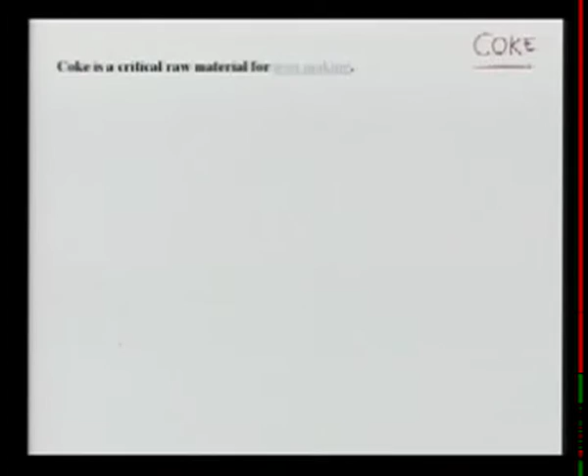Let's see what is the importance of coke. Coke is a very critical, very crucial raw material for iron making and steel making. Not only all large steel plants, as you probably know, would require coke, but also small plants like foundries using cupola furnaces would also require the coke.

So let's see what coke really is and how it is manufactured. In all blast furnaces, if you recall from the metallurgical processes you studied in high school, for operation of the blast furnace, a pure form of carbon is required for the reduction of iron ore, and that also needs to supply some kind of energy. So this reduction undertaken in the blast furnace is essentially because of the coke.

So coke is very essential in manufacturing of steel and iron, whether in large plants or small plants. This pure carbon is called coke. How it is manufactured, we'll go very briefly through the process.

Coke is obtained by destructive distillation, and that process of destructive distillation is also called carbonization of selected coking coal. The coal is carbonized at high temperatures, about 950 to 1050 degrees Celsius.

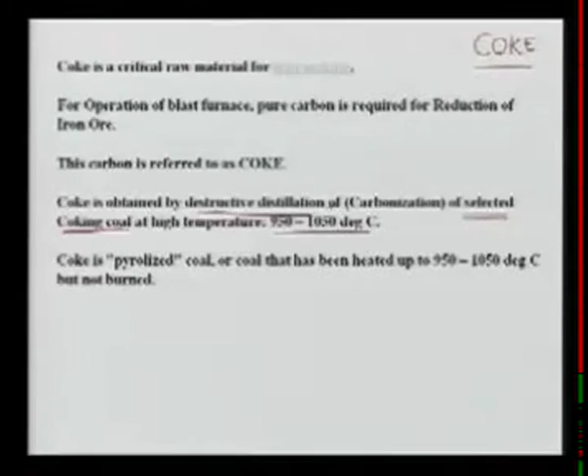Coke is basically pyrolyzed coal. Pyrolyzed means heating something in the absence of oxygen, or near absence of oxygen. The coke is pyrolyzed coal that has been heated up to 950 to 1050 degrees Celsius, but not burnt. We don't want to burn the coal, because out of the coal we want to produce coke, and we only want to heat it externally.

So in the process of heating, what happens to the coal? When you heat the coal, complex organic molecules are formed. Those molecules break to yield gases, some liquid also comes out, and solid organics also come out in the process of carbonization. But what is left, which is of importance to us, is the non-volatile carbonaceous residue, and that is what we call coke.

We will see the process of coke manufacturing in a little more detail, so that we can identify the sources and the important issues associated with coke manufacturing that we need to discuss in this course.

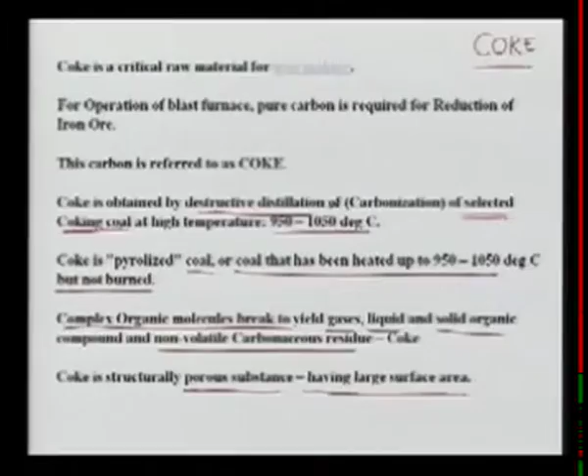Structurally, if you look at coke, it is a very porous substance, and the idea of having it in a porous form is to have a large surface area, so that the reaction, especially the reduction process going on, effectively takes place in the blast furnace or wherever the steel is being made.

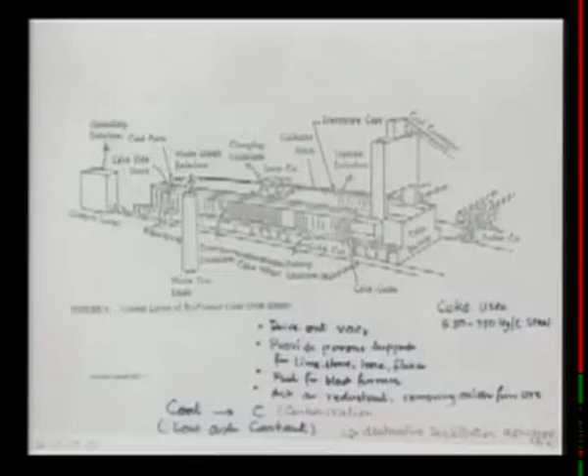Let's see a schematic picture that gives you an idea. I will give you the dimensions a little later, but just see what it takes to make the coke. This figure is the general layout of the byproduct coke oven battery. I will explain what byproduct means, but what you see here is a long housing kind of structure with lots of slits, for example, I will just hatch a small slit here.

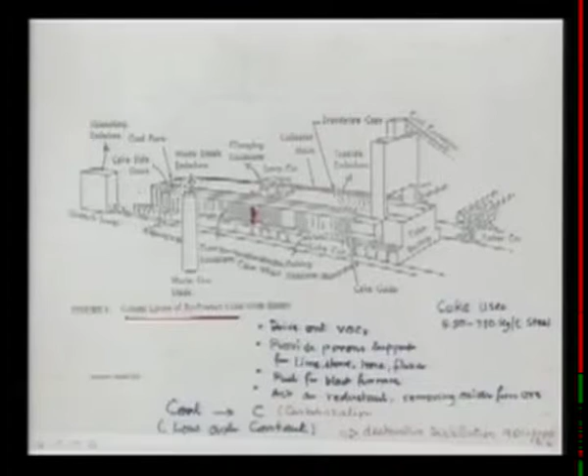Okay, this is a small thing - what you see is a coke oven. There are a series of ovens, as you can see, there could be hundreds of them in this direction. On the top is what we call the Larry car. This Larry car has the coal, and it fills the ovens from the top.

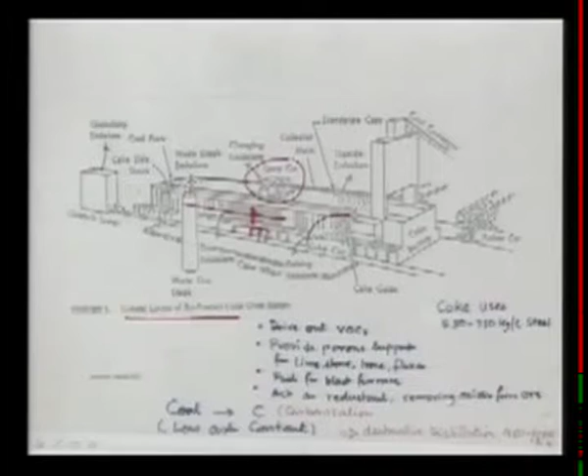Down here, the little rectangles, as I am drawing them for you, is where the heating is done. The gas is burned through this area, and the heated air or gases go up and cook the coal. The coal gets heated up in the process, and the emissions of gases or complex molecules get emitted. Once the coking operation is complete, the coke is ready, and as you can see here, coke is being pushed out and put into the coal car.

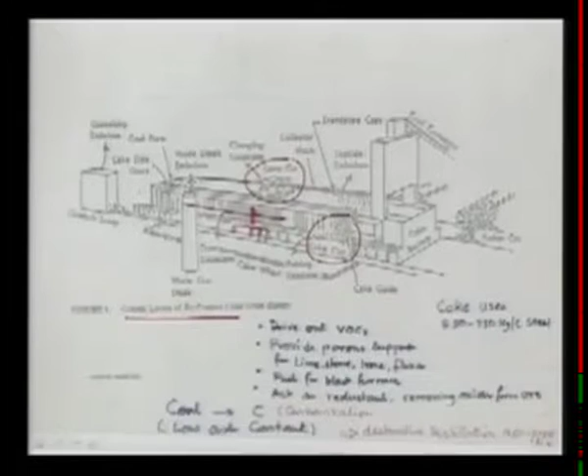So the idea here, I will repeat, is to drive out the VOCs - volatile organic compounds. We don't want volatile organic compounds because we want the pure carbon. So basically we heat things up, whatever is volatile will go away, and this provides the porous support for limestone and other fluxes in the blast furnace. It is also a fuel for the blast furnace, and it acts as a reductant, removing the oxygen from the ore. So basically we are transferring coal into carbon using destructive distillation.

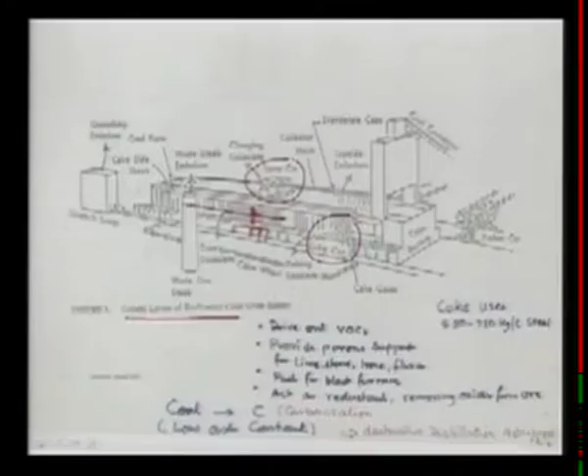What I would do is make a little bigger picture, show you the bigger picture, so things become more clear to you, and that picture just follows.

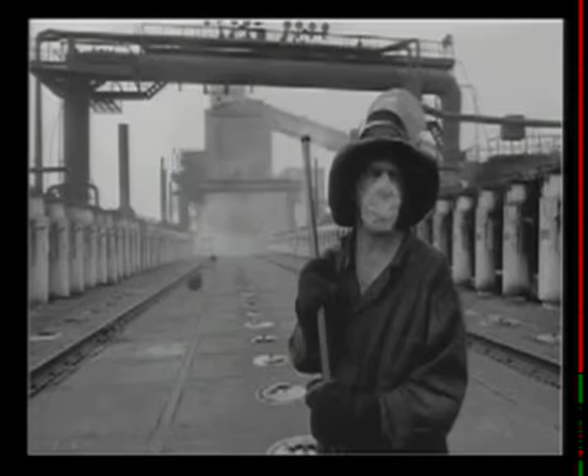This is a real coke oven that I am showing you just to get a feel for how it looks. Before going to the sources, you can see this person here with the mask on his face standing on the top of the coke ovens, on the top surface of the coke oven, and somewhere here you can't see is the Larry car, which I mentioned.

So in this Larry car there is coal filled on top, and these are the holes. You see here the railway track - the Larry car moves on this track, and whichever oven's holes are open, the Larry car sits right on top of it, and coal is put into the oven, and the heating process goes on. You can also see that as the coal is being charged into the oven, there are a lot of dust emissions, as you can see in this area on your screen.

This emission is a serious problem, and we will learn why it is serious. You can see the person standing there - of course there is a lot of heat, temperature is very high, and also the emissions are so toxic in nature that the person has to wear a mask. We will discuss the emissions and what they are in terms of toxicity and the problems they can cause to our human body.

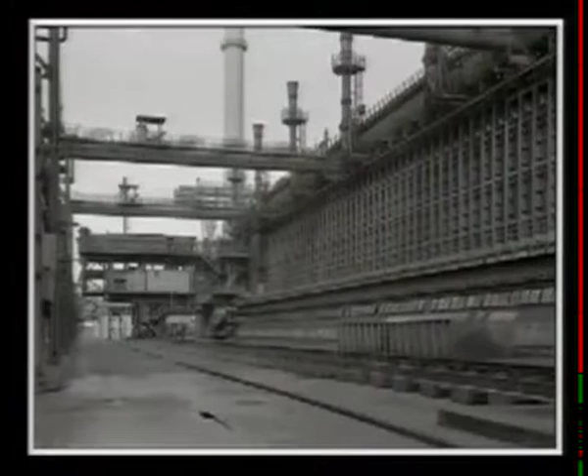So this is just to give you a little feel, and this picture is only at the top of the battery, top of the oven - and I must specify, a group of ovens is called a battery. So this is one single battery. This picture is taken from the side or from the ground. You see here, the Larry car was somewhere here at the top, and the person was standing somewhere here, but now we have the picture taken from the ground.

This is our ground. So these are the ovens, as you can see this light here - the slit, for example, it's an oven. And here at the bottom is what we call the under-fire.

We'll see in detail later, but right now just understand that some heating is done, and this hot air flows around the oven but does not come in contact with the oven, because we don't want to burn the coal - we just want to heat it, something like cooking in the kitchen. We don't want to burn our food, but we just want to heat it. So the coal is heated externally, and the under-fire heats everything and goes out from this chimney, as you can see.

After some time, once the coke is ready - because we have to do the cooking of the coal at a temperature of about 950 to 1050 degrees Celsius, and the cooking normally takes between 20 to 30 hours - once the coke is ready, we need to push it out, and then we will see.

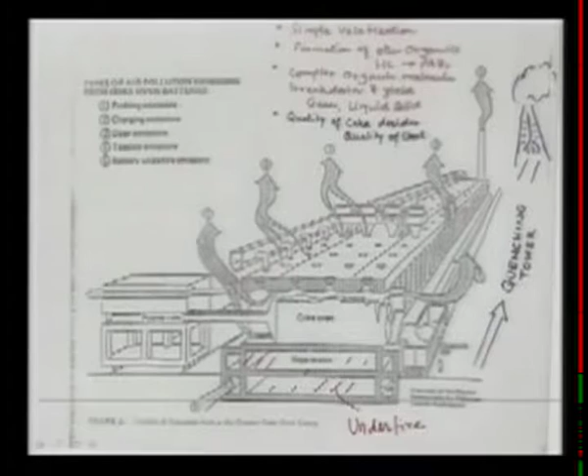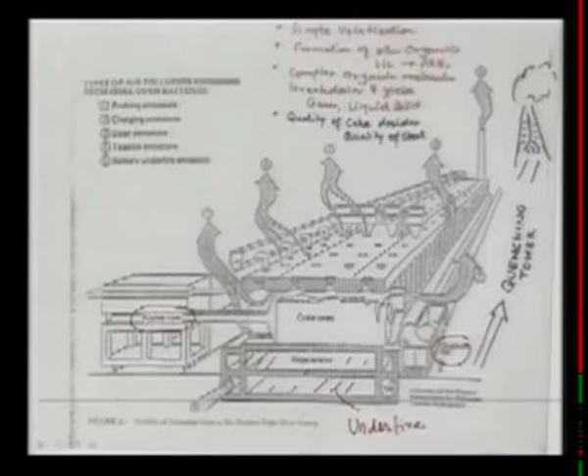So this is coke, and as you can see, as the coke gets ready, it's being pushed. This is called the pushing ram. It's ready, the whole thing is being pushed, which takes away a lot of energy and requires huge machinery. You can see this whole thing falling down onto what is called the quench car. Can you see here? Quench...

Quench car. Why quench car? Because we must quickly cool off the hot coke. If we don't cool it off, since it's hot and open in the air where oxygen is available, things start to catch fire. So if you don't quickly quench it, it's going to catch fire, and you'll see flames coming out, and our entire purpose of coke making will be defeated.

So as soon as the whole thing comes out, we should quickly take it to the quench tower. The whole thing is on a railway track, and it's pushed quickly in this direction and taken to the quenching tower. I have drawn this picture of the quenching tower, and we'll see a little later what the quenching tower is and what it does.

The idea of the quenching tower is to put lots of water, tons of water stored on top, onto the coke, because we need to cool that down. We don't want it exposed to the atmosphere so that it starts burning, otherwise we are in trouble both from the pollution point of view and the production point of view. So this is one part.

Let's go back to the top of the coke ovens and see what is happening. You see here the coke oven top. This is the Larry car which I showed you, and these are what we call the charging holes - this is a charging hole, this is a charging hole, and so on. The Larry car moves back and forth and fits exactly onto the charging hole. For example, whatever oven this is, that's being charged.

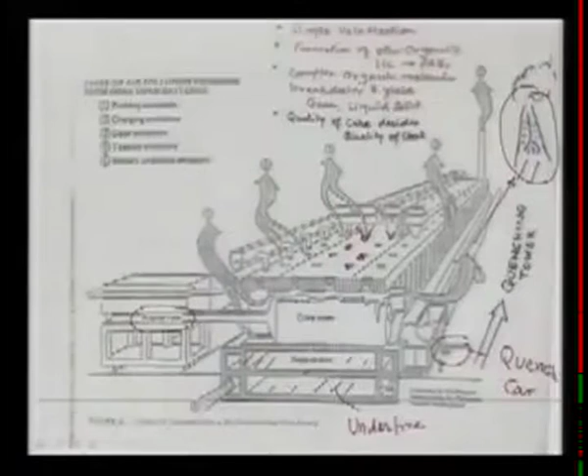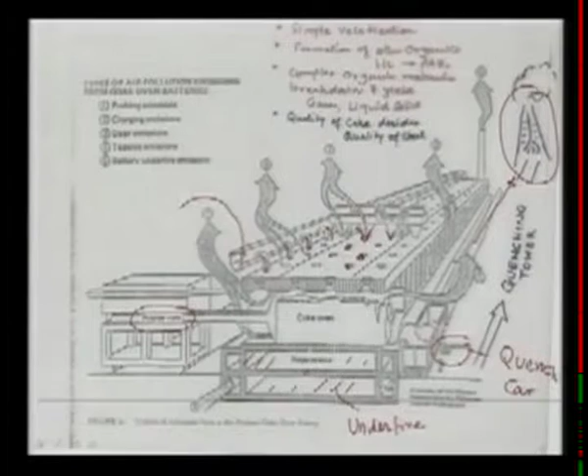The air must come out. Where does that air go? What you can see here is this air, which is being replaced by the coal, is driven out from these pipes. This is the pipe which is active right now, and all the air that gets replaced and all the emissions that take place are passed through this duct, if you like - this is the duct. This is called the mains.

All the air that gets replaced, and in the process whatever emissions take place, must go to this duct, and then all the dirty air is sucked through this duct and taken to a process called the byproduct recovery plant. Right now we are not showing the byproduct recovery, but you can see in the title there is a byproduct recovery. So all the emissions that take place must go to the byproduct recovery plant. Otherwise, if we did not have this duct here and had not done the collection of the emissions, they would come out in the air and cause lots of problems.

You can already see we had this main, we had the collection system, and even then the person was wearing the mask, so there were problems. But if we had not had this main, the emissions would be even more enormous. So it goes to the byproduct recovery plant.

Having said that, you can also see this chimney, which is number 5 - these numbers will come slowly. These are the emissions taking place from the underfire. The underfire gets heated up, and then it comes out from the chimney at the end through this chimney, so again emissions take place.

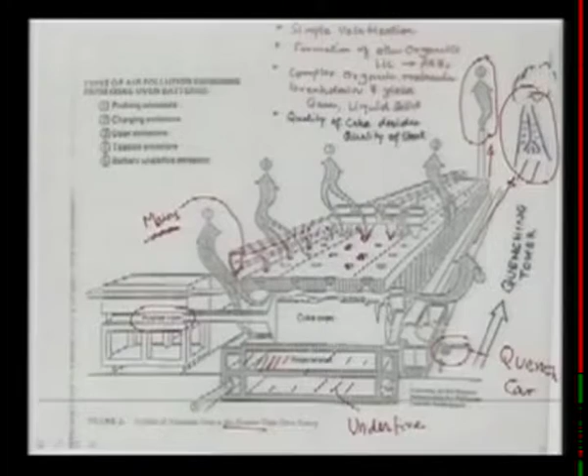So now let's look at the fact that although we have the mains and most of the pollution or emission is being collected and going to byproduct recovery where we'll control this source, in spite of having this system, there is still air pollution that takes place. The major sources are listed as number 1, number 2, number 3, number 4, and number 5, and I would also say number 6, which we will talk about in a moment. Number 1, as you can read here, is called the pushing emissions.

Pushing emissions occur because as you are pushing the things out, whatever vapor forms or vapor compounds are there get emitted from the sides. Earlier everything was closed, but now it is open because we are taking the things out, so all these emissions take place.

The second thing you can see here is the charging emissions. The charging emissions occur when you are charging the coal, and who is charging the coal? The Larry car is charging coal. When the coal is being charged, as it replaces the space underneath or the air, the emissions take place - that is emission number 2.

This emission is very significant. In fact, the picture I showed you of the person wearing the mask - he was trying to stay far away from the Larry car so he wasn't exposed to the air pollution problem. So here the emission takes place as the coal is being fed into the oven.

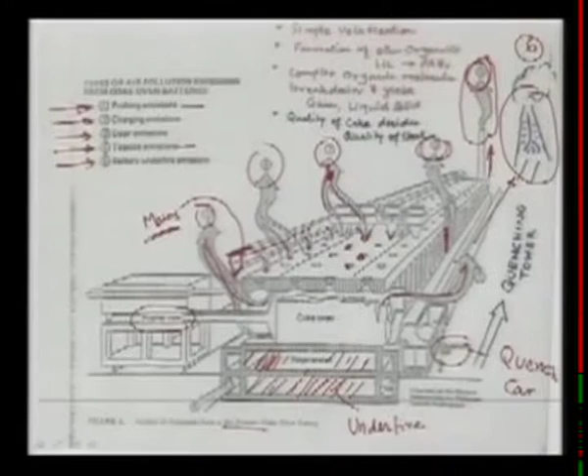But the number 6 emission, which is very important, is when the quenching car takes the coke out and goes all the way into the quenching towers. Huge amount of water is put onto the quenching tower, onto the coke, and we have large amounts of burning coke. We put a lot of water, so there will be a lot of emissions and evaporations, almost like vapor clouds. This will also cause serious air pollution.

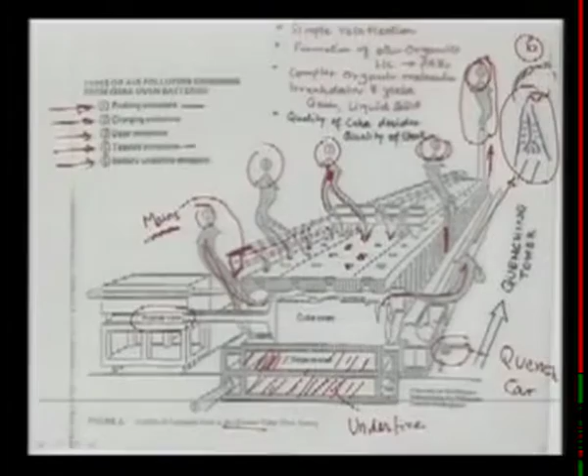So what we have covered so far: what is coke, why we need it, what its purpose is, how it is manufactured, and the main principle is the destructive distillation of the coal, which we call carbonization. We also tried to show you pictures to give a feel of how big these units are, and what are the possible sources of emission even from a plant which has a byproduct recovery system, and why these emissions occur.

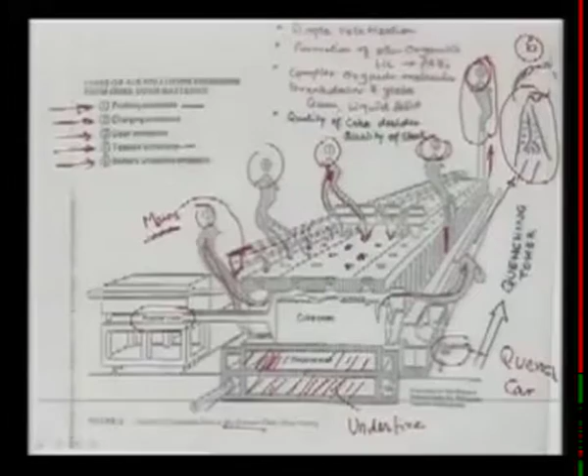Mostly they are door leakages, top emissions, under-fire emissions, pushing emissions, quenching tower emissions, and battery under-fire. So you can see these emissions will still take place in spite of the fact that we have a collection system. If we had not had the collection system, things would look very bad - it would almost be difficult for anyone to even stand close to the plant.

So these are the issues, and then again we will go to the next slide and try to show that pollution is there, but what is so special, what is so important that we need to study it separately in a separate lecture and not just combine it with some other lecture.

This picture I have already shown you, now let us go to this one. Let us look at the emissions. I've given you the general emissions, and now we'll go to a little bit of the specific emissions. Just to get a little feel, I'll read the sentence here.

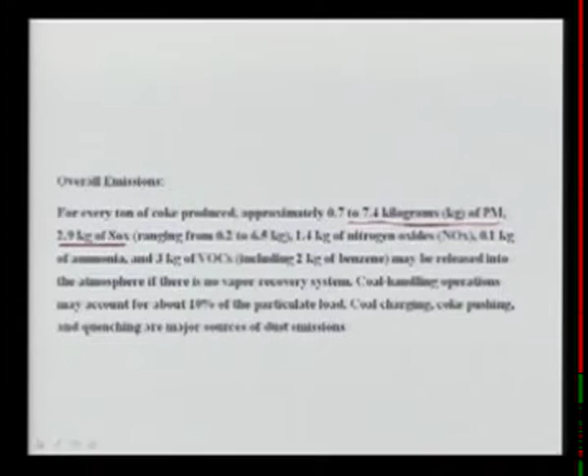For every ton of coke produced, approximately 0.7 to 7.4 kilogram of particulate matter - PM stands for particulate matter, which is largely dust - and 2.9 kg of SOx, oxides of sulfur, are produced. Huge amounts. Let me give you a little feel as to the coke requirement, so that you know the quantity of coke required.

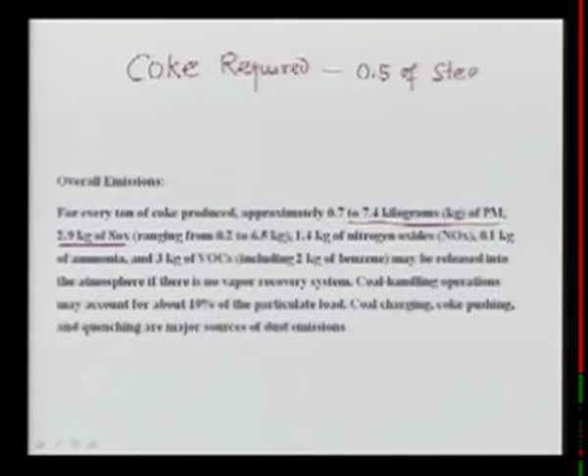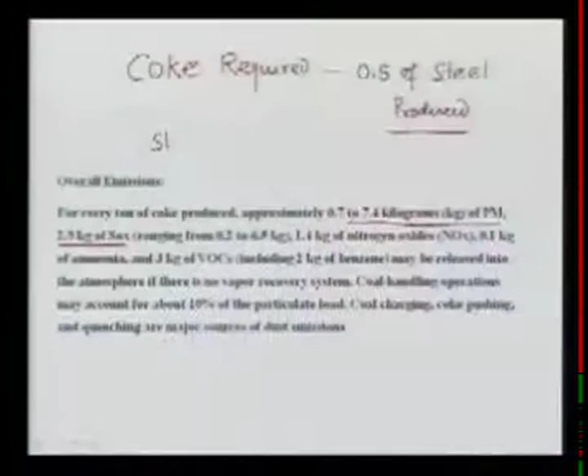It is almost 50% of the steel produced. You know that steel plants are very huge, very big plants - size varies, but a typical plant on the larger side can be a 10 million ton plant. This is a very large plant, with an annual capacity of 10 million ton.

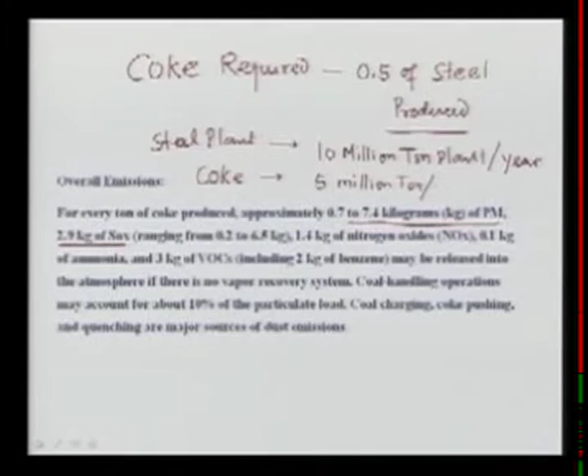So to give a little feel, this plant will require coke of about approximately 5 million ton per year.

These are not the small quantities that we are talking about. Once we are making the coke, what are the emissions that are taking place? 0.7 to 7.4 kilograms of particulate matter, 2.9 kg of oxides of sulfur, 1.4 kg of nitrogen oxides, 0.1 kg of ammonia. Look at that. You wouldn't expect ammonia, but the ammonia is also emitted.

3 kg of VOCs - you remember VOCs stand for volatile organic compounds, and most of them are cancer causing, which can very adversely affect human health. So that becomes very, very important. Including 2 kg of benzene, and you all know benzene is a carcinogenic compound. Benzene is also emitted from automobiles, and we all talk about benzene control, but this is in no way a small amount.

This is a huge amount, and may be released into the atmosphere if there is no vapor recovery system. Vapor recovery system is the same as I was talking about the byproduct recovery plant. If there was no byproduct recovery plant, the emissions could be of this order as specified in this slide.

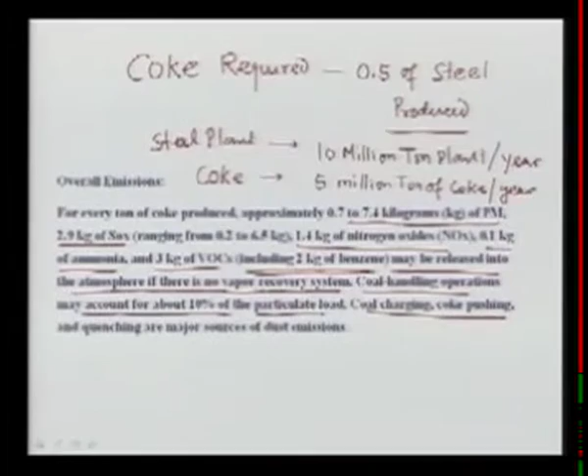Apart from this, coal handling operations may account for about 10% of particle load. Coal charging, coke pushing and quenching are always a major source of dust emissions. So you can see both in terms of quantity the emissions are large, and also in terms of toxicity, because some of the compounds emitted are very serious cancer causing compounds, and we need to control them.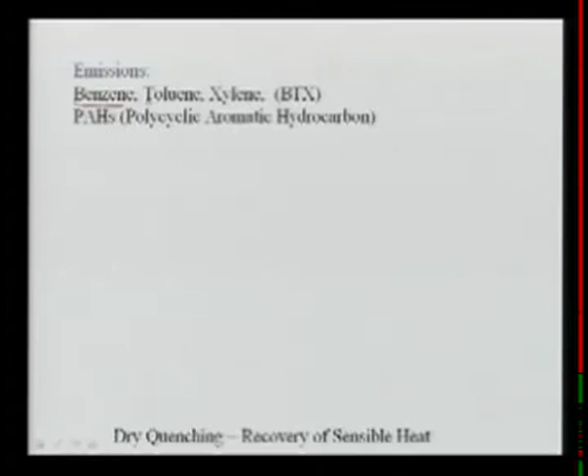So the emissions are not only particulate matter, SOx, ammonia, but there are more things. Now we are trying to get a little bit more specific to the kind of pollution taking place. The benzene I said earlier, but in other quantities, toluene is also emitted from coke making, as is xylene.

The common name given to these three compounds is BTX. So in the rest of our discussions, we will refer to this emission as BTX rather than simply calling it benzene, toluene, xylene. We will simply call this the BTX.

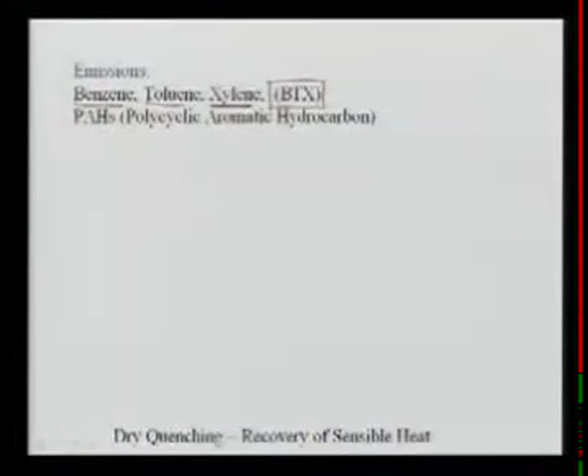Apart from that, these emissions also include PAHs, which are nothing but polycyclic aromatic hydrocarbons. These are again a group of compounds, very toxic, proven carcinogens, meaning they can cause cancer in the human body. So this becomes an important issue.

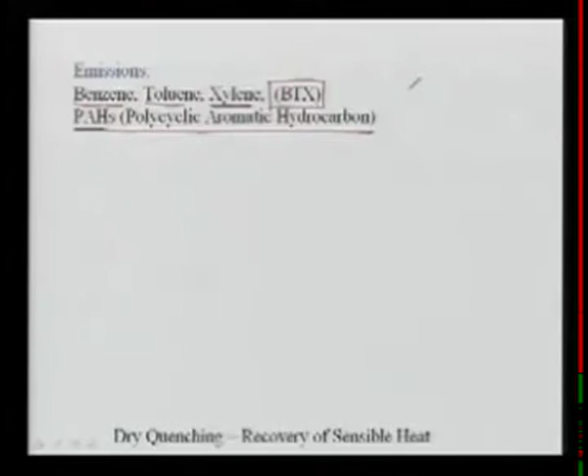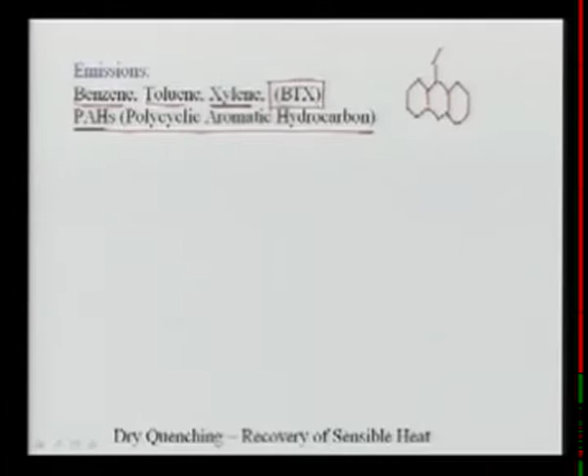If you don't remember what aromatic hydrocarbons are, when you have more than 2 benzene rings fused with each other, that becomes a PAH. You can see here there can be many benzene rings as I am drawing them, that can also be combined like this. So this is a typical chemical structure of PAHs.

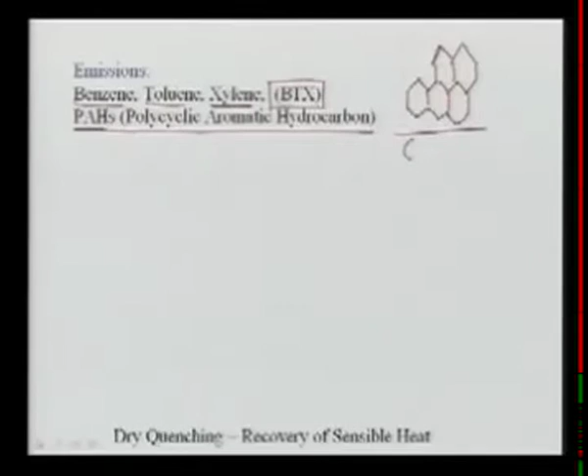This is just one compound, and you can see you can almost produce hundreds of PAHs, and most of these PAHs are carcinogens, which can cause cancer, and therefore we need to control them.

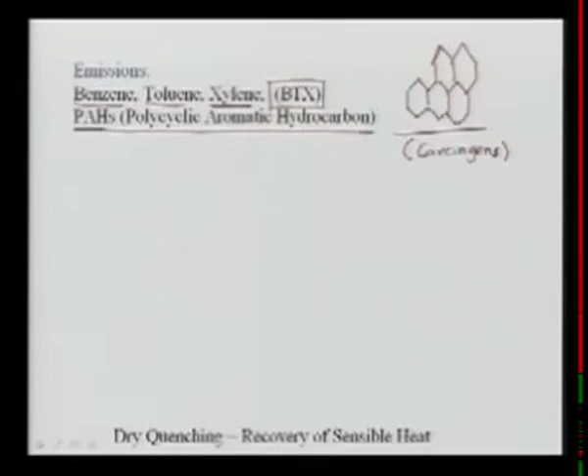So this is the table showing what we had discussed as the sources of emission, but we didn't discuss what kind of emission comes from each particular source. So I made this table so you can see, depending on different sources, as you remember we talked about sources 1, 2, 3, 4, 5, 6, what would come out from those. The first source was the chimney or underfire, which will have combustion related emissions, because here we are burning things.

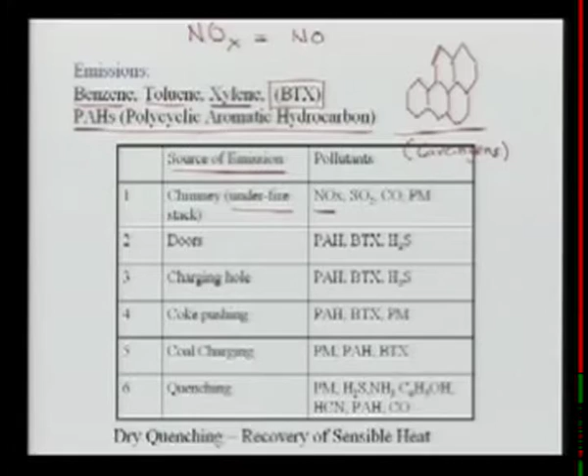NOx - you remember what NOx is? NOx is the summation of NO plus NO2, that is what we call NOx. So you have NOx, sulfur dioxide, some amount of carbon monoxide, and PM here is particulate matter - that is the dust.

Now we also remember the door leakages - simply we can even write here 'leakage'. Door leakage - and what emissions will come out? PAHs, BTX and H2S. The dust is not likely to come out, but carcinogenic compounds, a serious problem, and we also have the benzene, toluene, xylene and H2S. Why H2S?

Because the coal may contain some sulfur, and we are not burning the sulfur - conditions are reduced conditions. So this sulfur will come out as H2S or hydrogen sulfide gas, and as a result it may be worthwhile to indicate that the doors which are leaking more, H2S comes out.

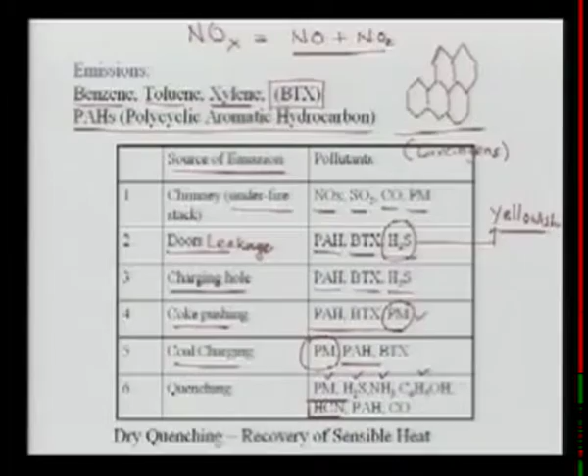It has also been reported that some amount of cyanide in the form of HCN is likely to be emitted in the air or becomes part of the water, since we are quenching the coke with water. So some cyanides have been reported, along with some PAHs and some carbon monoxide.

So what we have learned here is that in spite of the good recovery system, which works through the mains and the duct sucking the gases or volatiles being formed, there could still be emissions, and these emission quantities can be large, and not only large, but very serious in terms of their toxic nature.

This issue of the coke ovens becomes very significant, because it has a direct and very significant impact on public health, especially for the people operating the coke ovens. Remember the person standing with the mask on his face.

Let's take our discussion further and talk about some of the controls that we can discuss.

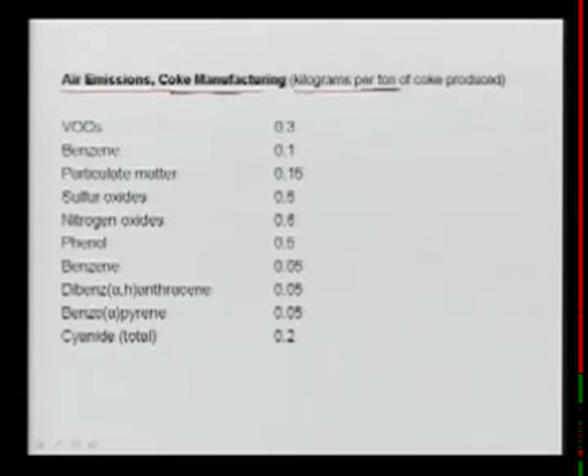This table shows the total air emissions that can take place from coke manufacturing, with units in kilogram per ton of coke produced.

These emissions being talked about are the uncontrolled emissions. These quantities are not small in any sense, they are really large quantities and they can influence the air environment.

Maybe this benzene, you also have benzene here, is probably in the water. The source where I got this information is from a World Bank document, I should have given you the source.

We now have a fairly good idea of what is being emitted and in what quantities, and why it's important, because of the associated toxicity.

I want to do an example for you just to give you a feel that these emissions are not small, they are serious emissions. Here is the example.

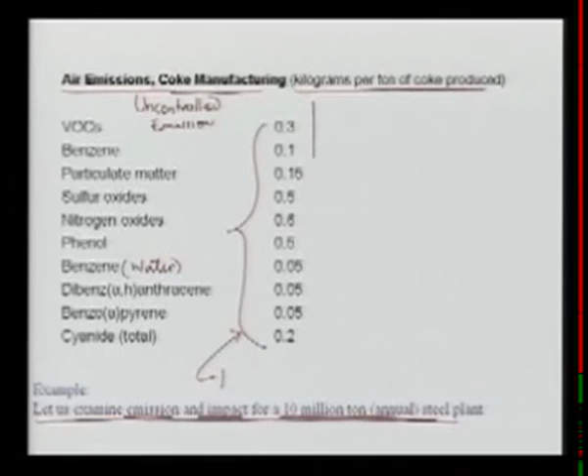Let's examine the emission and impact for a 10 million ton steel plant producing annually 10 million tons of steel. We'll look at emission of a compound, taking the example of Benzo(a)pyrene, the most dangerous compound in the PAH category, having 5 benzene rings. We call it BAP for short, and we'll consider its uncontrolled emissions.

For a 10 million ton steel plant, how much coke does it need to produce? The coke you need is 50% of the steel that you are making. And how much steel are you making?

Tons per year, okay, so this is my coke requirement, simple thing. Now I want to know my coke in terms of tons per day, because I also want to see the impact.

So I have 0.5 into 10 into 10 to the power 6, and suppose I am taking about 350 days of working of the plant. So if I take this as 350... am I doing right or wrong? Yeah, I'm doing right. Okay, let's write it properly.

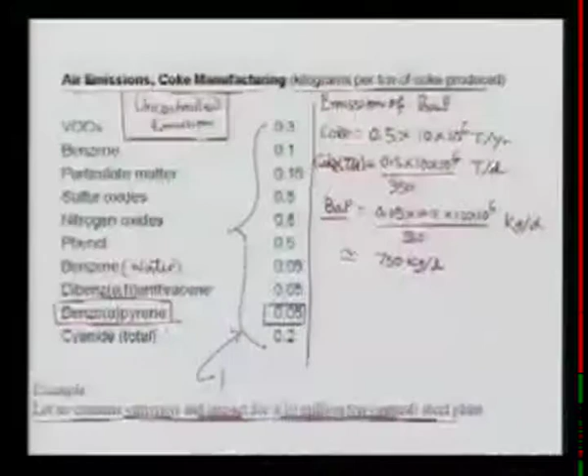Now let's also see what it really means to the people living in that area, because after all, public health, good health of the people is what environmental engineers always try to do. So suppose, it's a simple example or calculation that we are doing. There are more complex, difficult ways to do all this. Assume that the entire BAP amount is spread into the volume of, let's say, 5

kilometer by 3 kilometer and height of 1 kilometer. Let's say everything disperses into this, and what it really means in terms of the concentration of BAP that people will be breathing in their lungs. So that's what we want to find out.

So let's do the concentration part, the concentration of BAP, and this is what we are talking about every day. So almost 750 kg is emitted. And how much volume? Let's write in meters. 5 kilometer equals to 5,000 into 3,000, into 1,000. And then I can convert kg into grams, and grams into micrograms, and the units now I am having is microgram per meter cube. So 9 zeros I can remove.

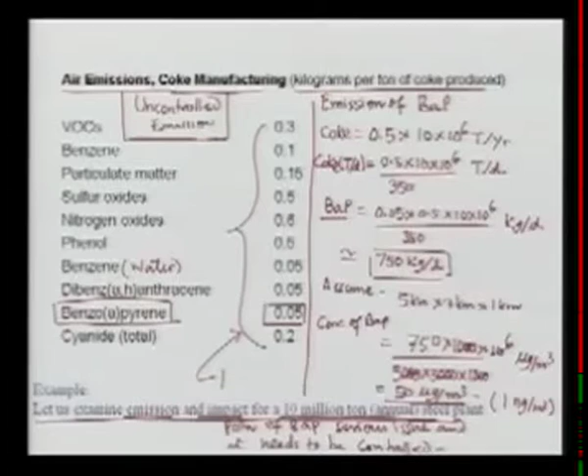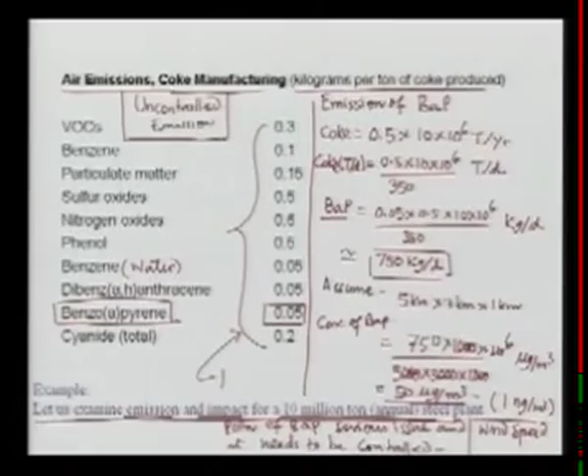So we need to control all sources. Just simply saying BAP must be controlled is not enough; in order to plan the control, we should know where to control, what are the sources and what are the difficulties. So we'll talk about some of the control systems people are using. This is a simple calculation - normally we should also account for the wind, but we've taken a simple example to give you a little feel. The actual modeling part we learn a little later in the course will require more information on the meteorology, wind direction, and other things, but we won't discuss that right now.

Okay, now let's talk about the control. Let's recap what we have done so far. We have talked about the process, what is coke, why it is required, what is the process, what are the emissions, what are the emission sources, and within the emission sources what are the important compounds we need to know. We did a little example to show how much could be released and what the impact could be. So we have concluded that we need to control these emissions.

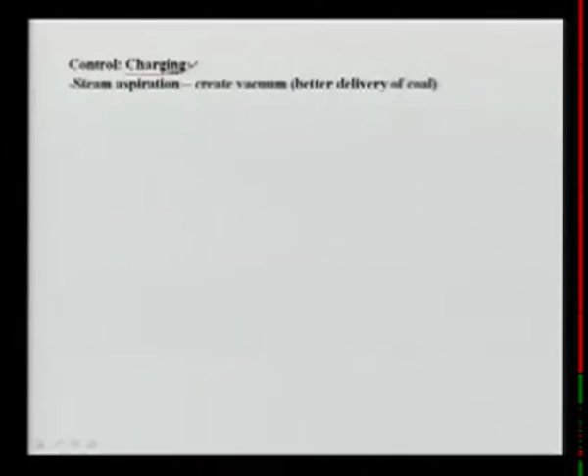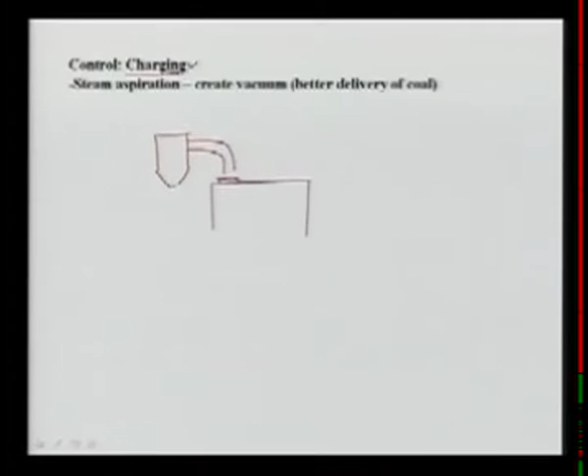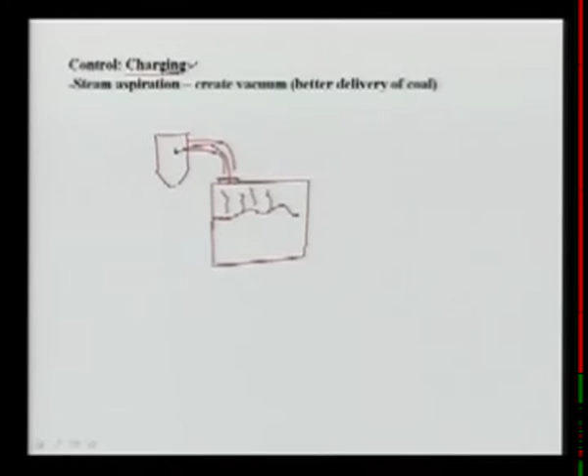So let's see what we do in the main duct. The problem we are talking about right now is at the time of charging, what can be done. You remember there was a main duct. This is a cross section of the battery, and this is the coke that is being made. Whatever emissions are taking place, because this is under positive pressure, they are sucked through this main duct.

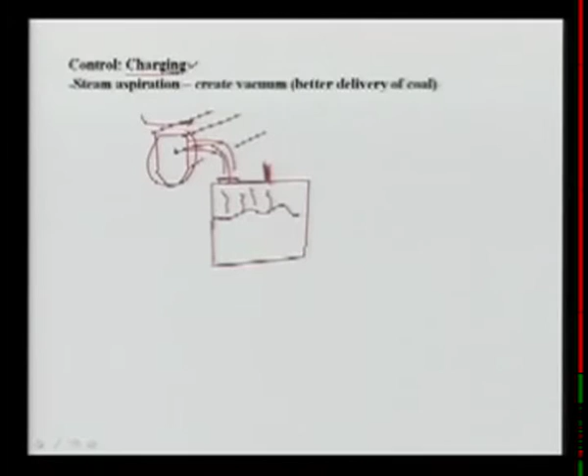So what is done is, when we are charging something, the larry car is sitting here and pushing something, so that is the time we should increase the vacuum and increase the suction rate, so that whatever emissions are taking place are taken out. How it's done: suppose at the side I put some steam in, it creates a little vacuum here, and quickly all these emissions will go through. So that is what we do, create a vacuum, so that there will be better delivery of the coal. By creating more vacuum at the time of charging, we are sucking more.

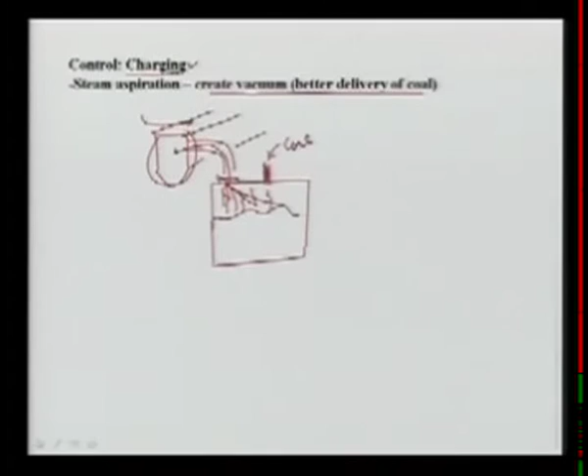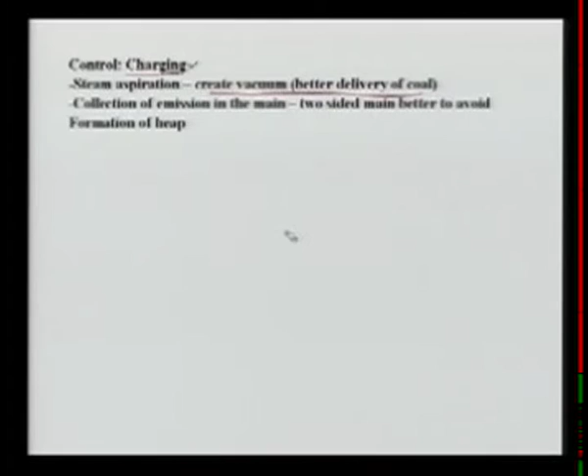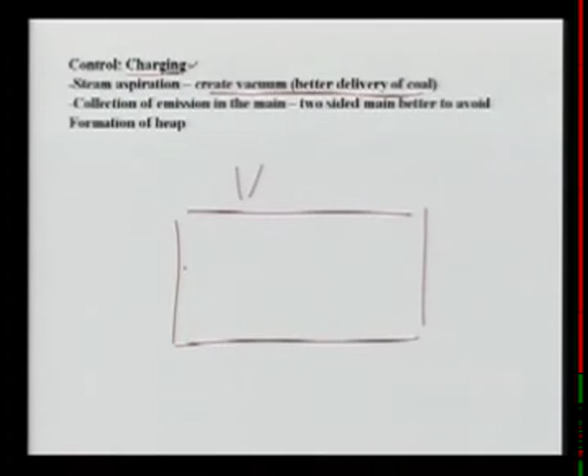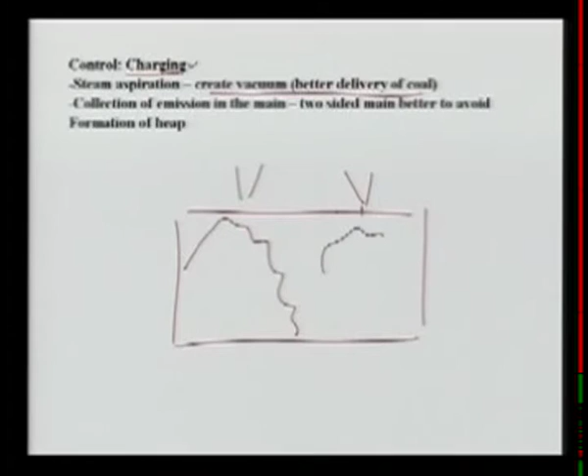Let me remove this so you can see it clearly. Collection of the emission in a two-sided main is better to avoid the formation of a heap. See what happens: suppose you are charging, and this is your oven, and as you charge from the larry car, it will form a kind of heap here, and as you charge on this side also, you create a little heap here. So the new technology is that you take this to the main pipe or main duct, which looks something like this. You should also do it from this side as well, so that from two sides you are taking out the dirty air, not just from one side. That's what is written here: collection of emission in the main, two-sided main, better to avoid formation of the heap.

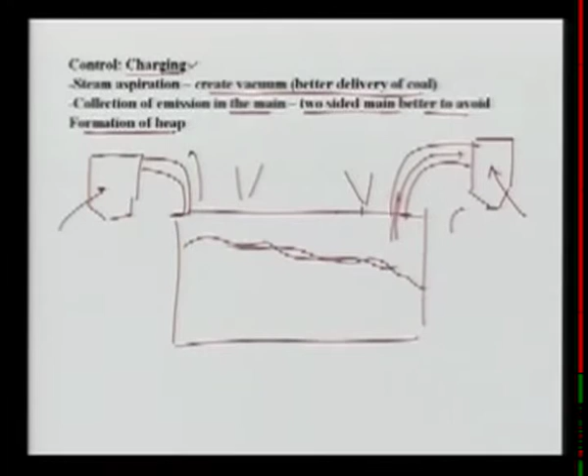Otherwise the heap will be formed. If you are sucking here, the heap will not be formed. If you are sucking from this side and that side, the coal will not make a heap, but will tend to spread out over the whole area, because you are also sucking from this side. So the coal will spread, and the emissions will go to this main also and to this main also. And remember, the emissions go to the byproduct recovery plant. So this is how it can be controlled. The major pollution problem is during the charging, and we are able to resolve this problem. The emission is treated in the byproduct recovery plant. Once the emission is collected from the main, it goes to the treatment plant.

Some people are also talking about the leakages. The Larry car hopper should be tight with the charging hole, as the Larry car is charging and there's a hole here, this must be made tight, otherwise there will be leakages from here. This is the Larry car, for example, and this is the oven. So the fitting should be very tight.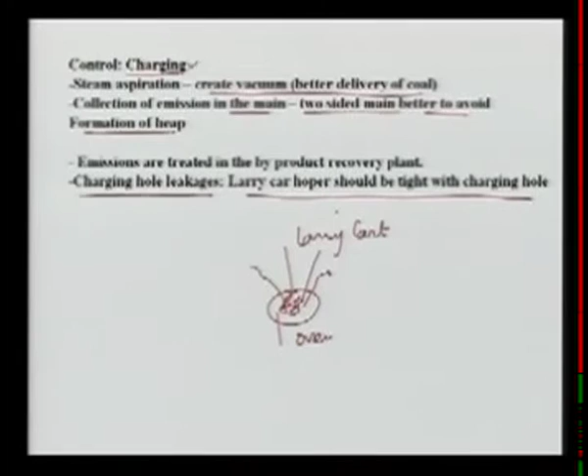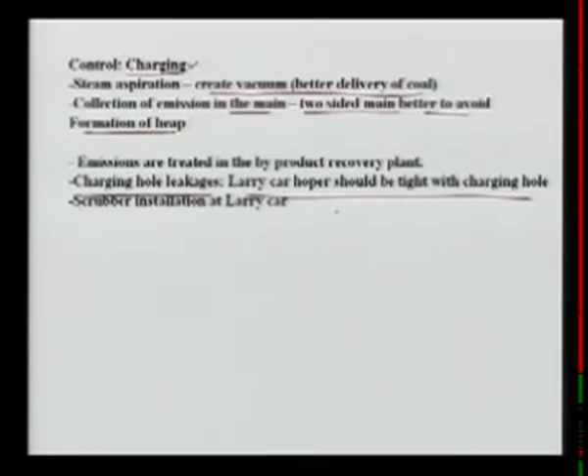And sometimes on top of the Larry car, a scrubber is provided to handle whatever emissions take place, so that is passed through the scrubber process.

After charging, the hole must be luted. Luted means closed and sealed, like how you'd use an M-seal. Luted means you put some chemical around it, mostly clay, so that the charging hole becomes airtight.

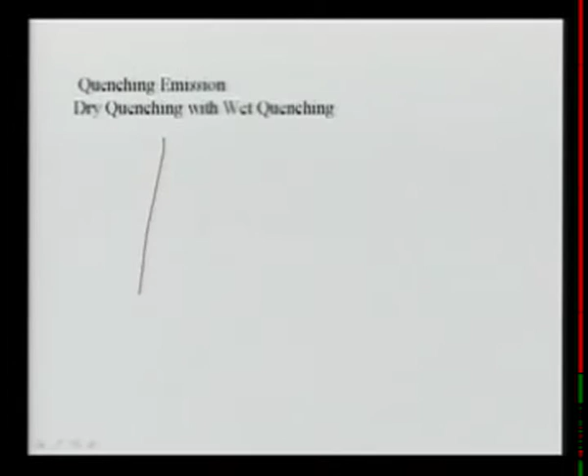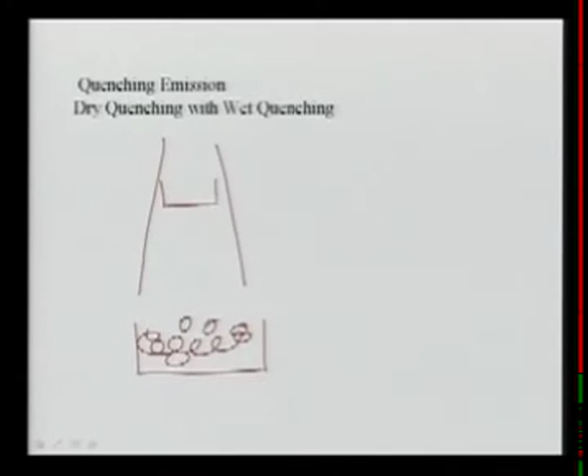In quenching towers, the cart with hot red coke is brought underneath, and there is a water tank on top. You open this water tank and the water starts falling down to cool the coke.

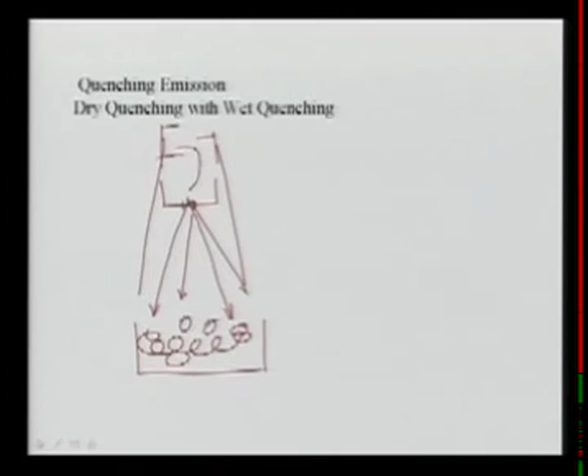But in this process there are a lot of emissions, so what people do is provide some kind of baffle trays. The dirt has to travel this path, and because of inertia the dirt will fall down. This is the wet quenching method.

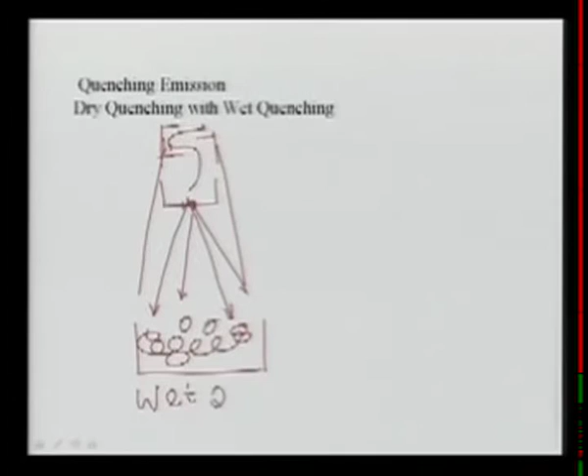The latest technology is dry quenching, an extraordinary method. You have the cart, and then you use an inert gas like nitrogen to cool the things.

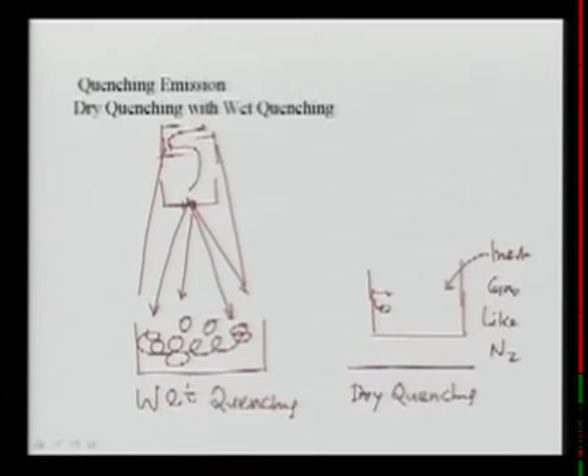So again, here is the hot coke, and once heated, we are cooling it off with the gas. There are no emissions, because emissions take place due to putting a lot of water onto it. In this process there are no emissions.

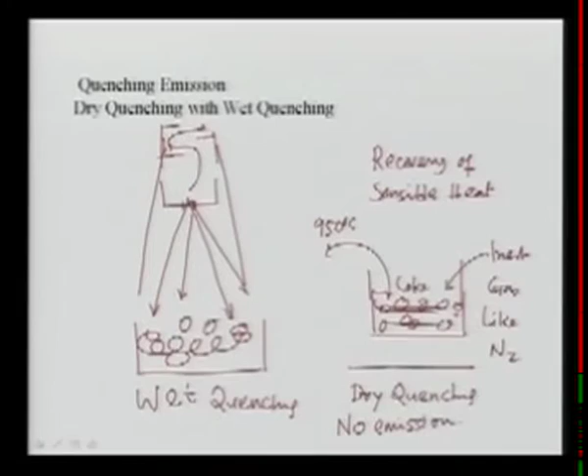Additionally, the big advantage of the dry system is the recovery of sensible heat, which is great for production economy. Remember, the temperature of the coke is nearly 950 degrees Celsius, and that whole thing has to be cooled off, wasting a lot of heat. Rather than wasting heat by putting water, we recover the heat using inert gases, so heat transfer takes place and the inert gases can be removed.

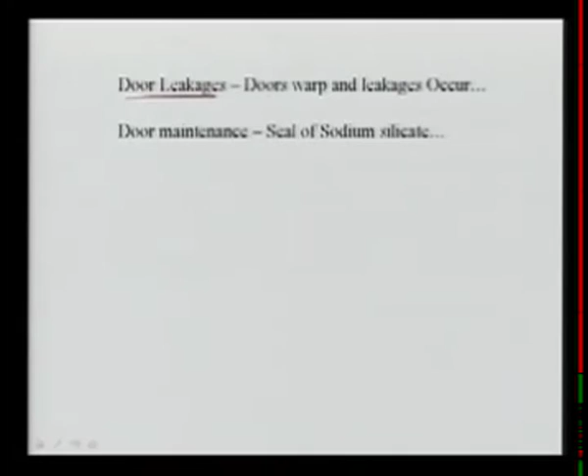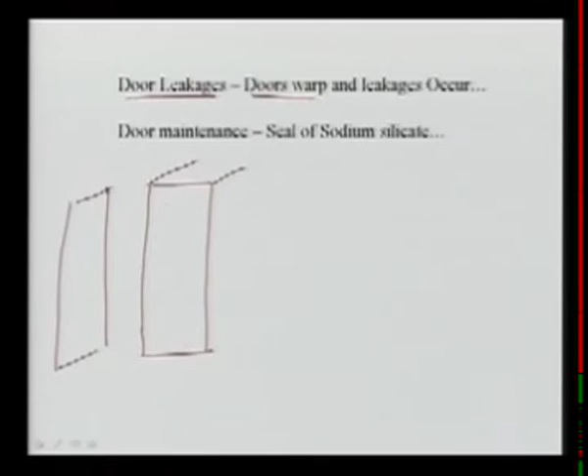The other problem was door leakages. As you recall, if I show you the section of the coke oven, there is a door, and this is the steel jamb, as it is called.

This door is also made of steel, and it should fit exactly onto the jamb. But because of high and low temperatures, if you look at the sides of the door, it is not a simple plane, so when it fits, there is always some leakage.

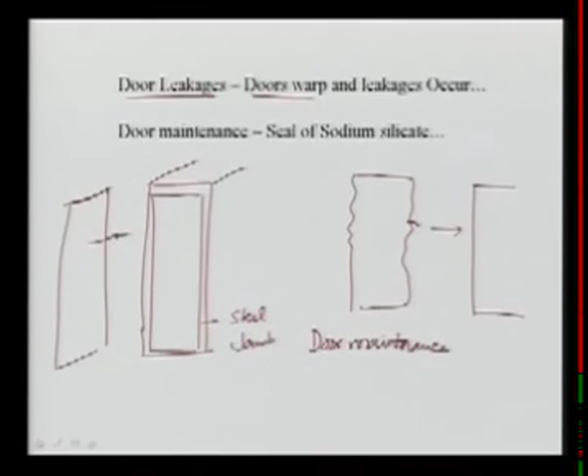So regular door maintenance is required. We have to clean the door and sometimes straighten it to make it straight, otherwise leakages occur from the sides where the seal isn't perfect. We need to stop and do maintenance, since particles get deposited and stop the door from fitting properly, so cleaning the door is important.

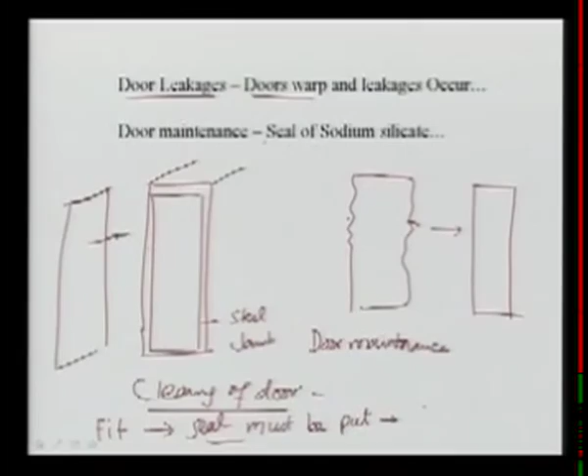Finally, once the door is fit, a seal must be put all around it. Nowadays people are using sodium silicate as the seal, and that makes it very effective.

So plant managers and engineers have been able to control these emissions very effectively. But to ensure effective control from both the production and health point of view, there are also laws and regulations from the Government of India that every plant needs to follow. Otherwise, pollution control authorities can close the plant or impose fines, because these are serious emission issues in coke manufacturing.

So quickly, we talked about coke making, the sources, the associated toxicity, and we did an example. We finally showed the possible controls, and on top of the controls, there are laws that industry needs to follow. We'll stop here.